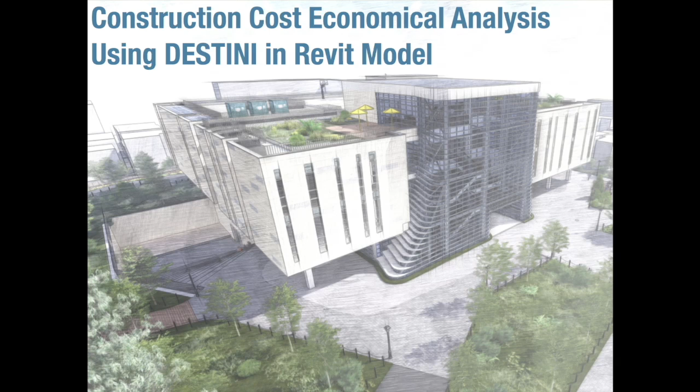During learning BIM in KICTE Academy, the idea started with the thought: if estimating before construction is possible, could it successfully analyze the economical feasibility? If it appears validated, in BIM infrastructure, preliminary estimation with WBS (work breakdown structure), which is possible to carry out only by big corporations, could it be possible also in any corporation when they use an estimation program such as DESTINI.

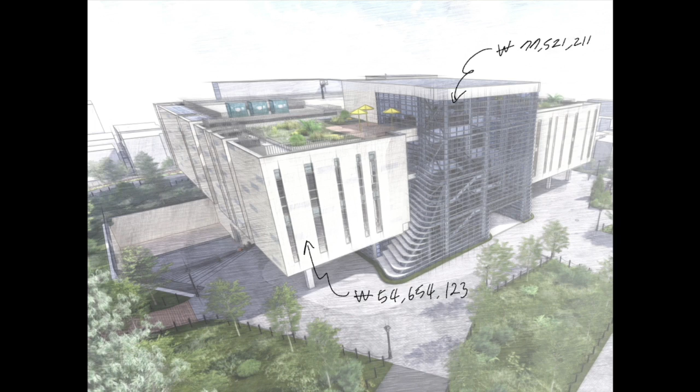Here's our index: a rendering of our project and its drawing system. Firstly, I will explain the tools essential in estimation with BIM, and secondly, the essential process. Then with main theory, we assume a case which could normally be applied in a construction project. Lastly, with the estimation process, we'll have a conclusion.

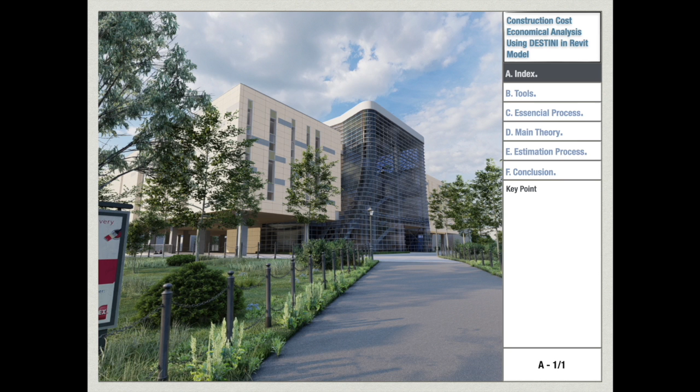Next is tools. Revit's quantity takeoff function is most essential for estimation. DESTINI the profiler could provide a preliminary estimation, obtained by depicting 5 components: mass, grid, cladding, level, and data. It allows estimation only by conceptual mass design, so it is a powerful tool for marketing purposes.

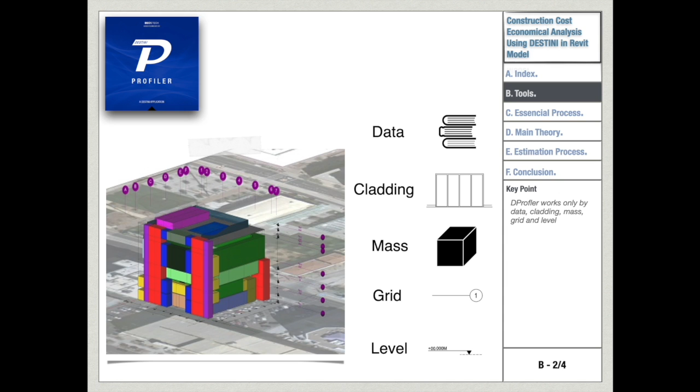DESTINI the estimator provides estimation by modeling quantities. It's a useful tool for maintaining construction cost during design, so that cost will not exceed expectation, or for keeping track of changes of drawing with estimation cost.

The process is simple. Firstly, pick construction method under WBS, and secondly, put in the quantity. Actually, it could be complicated when its price doesn't depend only on quantity, such as concrete construction.

Calculating net present value is important, since the construction project easily takes a year or two, meaning a future value could be different than expectation. Since most of the time interest appears as a positive value, future cash flow is lesser than present value. The NPV function is needed to sum up all the cash flow as a present value.

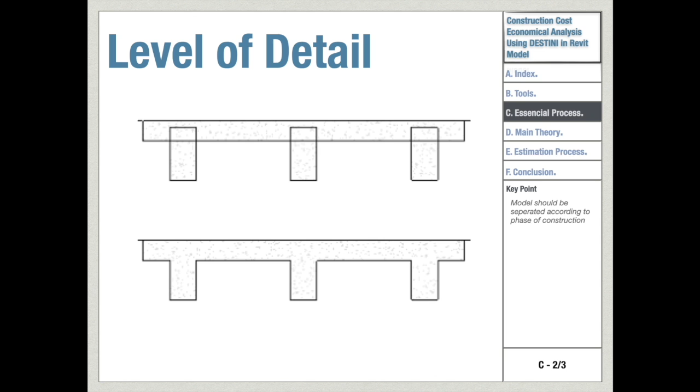And the Revit model should be separated properly. So joining elements should not be adjusted, which means the model should be separated properly, like this.

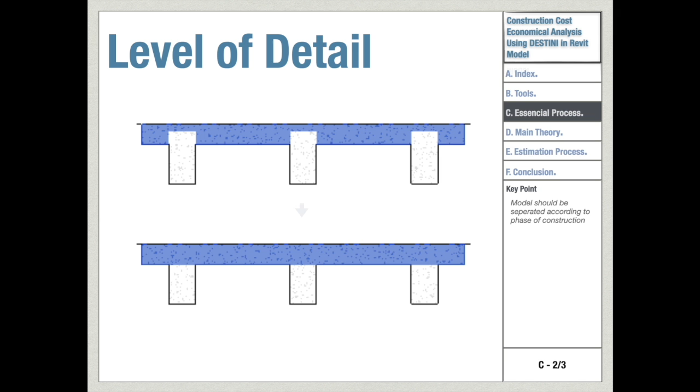It's the simulation in Navisworks. Actually, it doesn't represent a real construction order, but it shows the separated model.

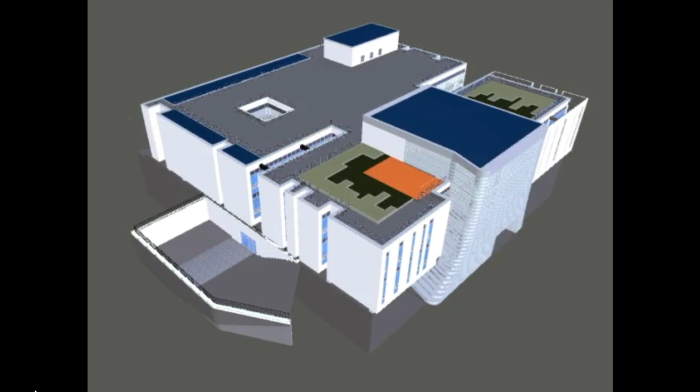Next is main theory and assumption. This book is by Chris Hendrickson and Tung Au.

This analysis method can be applied in any situation, where reimbursement lags one period behind, less retainage. To the general contractor or subcontractor, the cash flow profile is depicted according to a method of payment.

It's also made by the upper manager who decides the proper markup and considers MARR and retainage. MARR is a company's own interest rate. Since there's a safer investment opportunity in the company, comparing IRR with MARR, the upper manager should decide whether to perform the project or not.

As a result, two graphics could be depicted. One is an S-curve, which shows cumulative actual construction cost. The other is a stair-shaped graphic, which shows that payment is reimbursed one period behind. In most periods, except the last, the owner reimburses remainder expenses in excess of income.

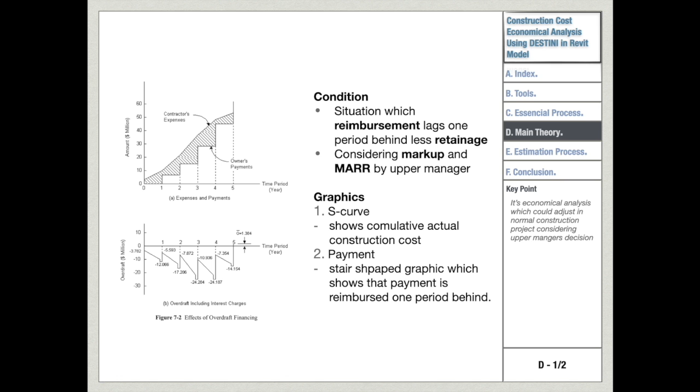We assume 13% indirect cost, 5% MARR, 2% markup, and 10% retainage, with a payment time lag of 1 month.

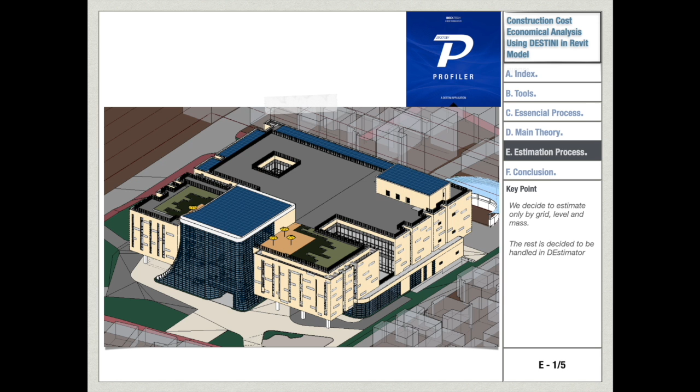Next is the estimation process. The profiler estimates by 5 components. However, we decided to estimate only by grid, level, and mass, and the rest will be estimated in the estimator.

In the estimator, we estimate a construction component by cladding and room model, like this.

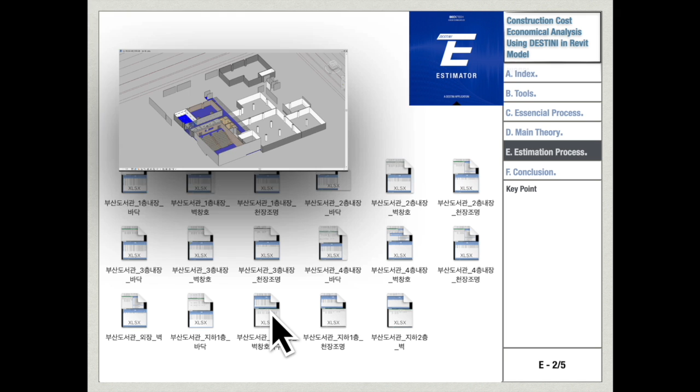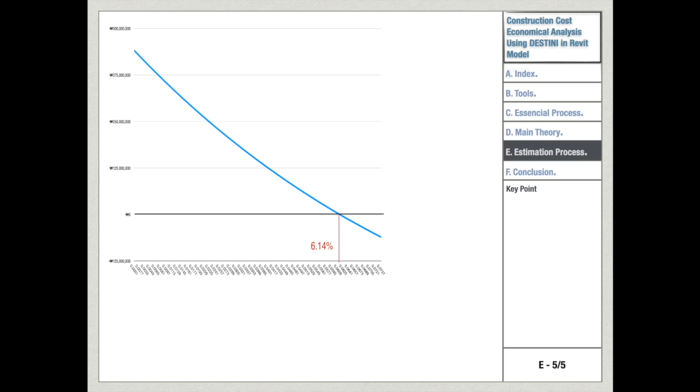For finding IRR, which makes net present value equal to zero, we adjust the NPV function from 0 to 10. This graph is depicted as such. As you can see, a high interest rate tells us performing the project would be nonsense. 6.14% interest makes present value 0, and since MARR is adjusted as 5%, it's profitable.

Lastly, conclusion. Traditional estimation methods are fair enough. However, a digital program using a Revit model is far better in credibility and agility. Most importantly, it could be handled with less human resources.